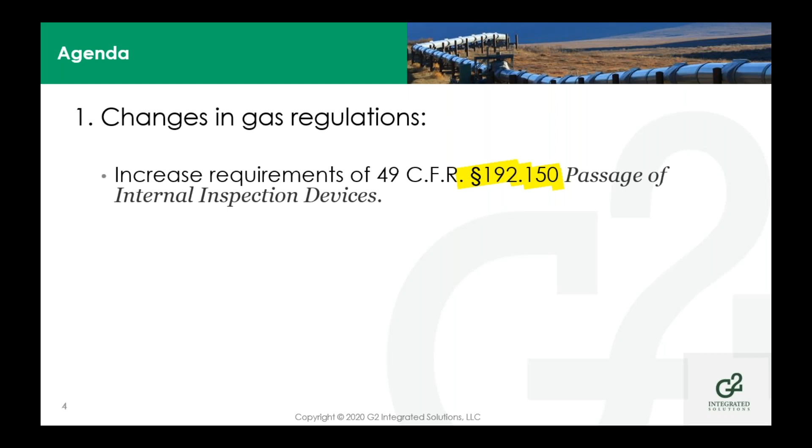Thank you, Marisa. Today we're going to talk about some of the changes in gas pipeline safety regulations. PHMSA will increase the requirements of Section 192.150, passage of internal inspection devices, and will incorporate 3 documents by reference in the new Section 192.493, inline inspection of pipelines. Finally, we'll go over a clear example of a specific implementation for a pipeline operator so that you can see what you need to do to be in compliance.

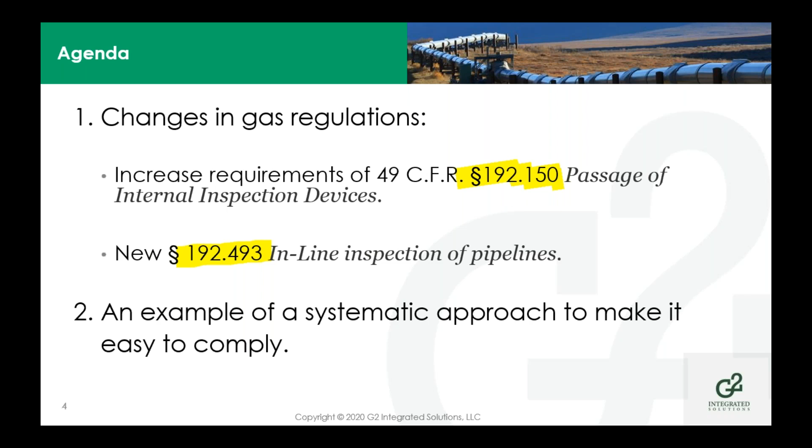So let's get started. But first, let me take you back in time 55 years to the year 1965. It is March 4, 6:03 a.m. A big explosion is about to happen.

Natchitoches, Louisiana, a high-pressure natural gas pipeline manufactured shortly after 1945 exploded, and the flames from the escaping gas were about 400 feet high before workers managed to stop the flow of gas by hand. The explosion created a crater 75 feet long by 30 feet wide. 3 sections of pipe with a total weight of 1,000 pounds were ejected as far as 350 feet away.

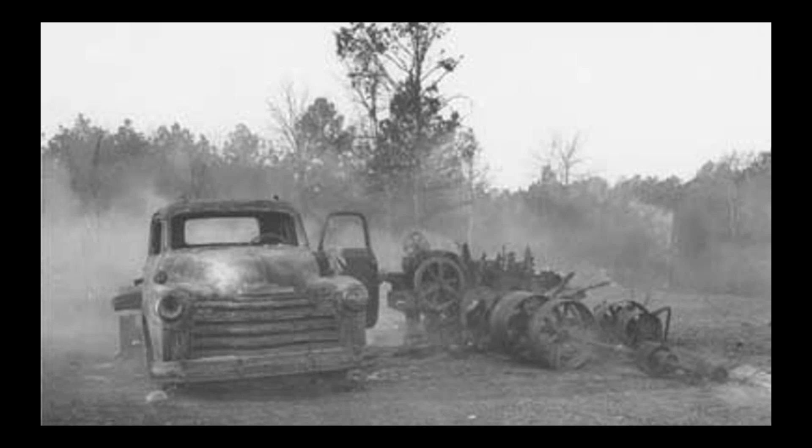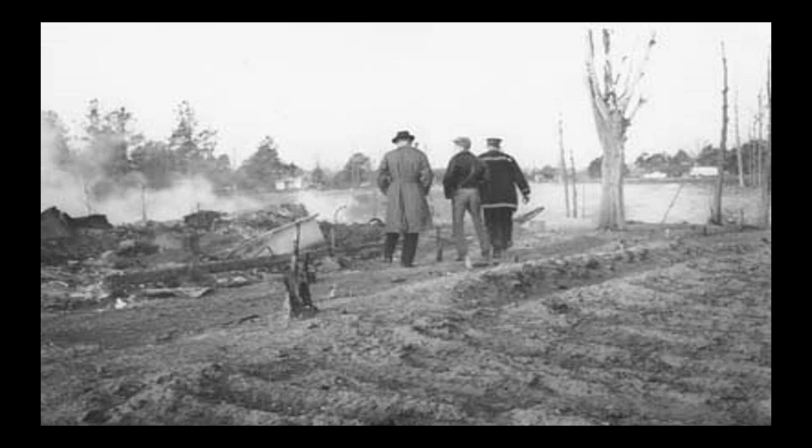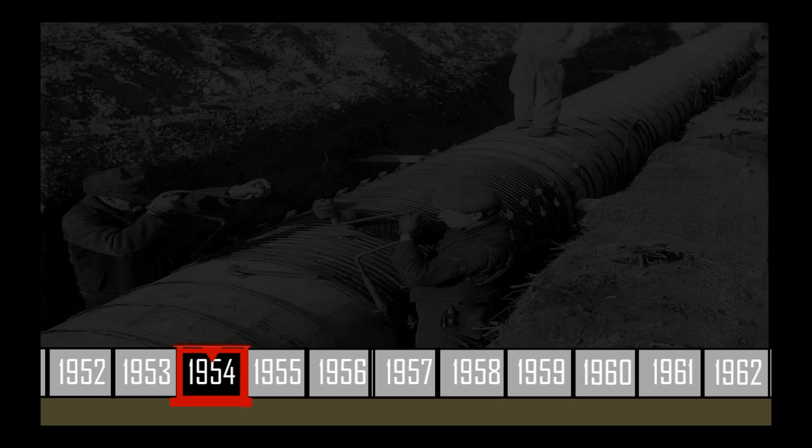There had been other pipeline incidents before, but this explosion focused attention on pipeline safety and led to then-President Lyndon Johnson to call for the formation of a National Pipeline Safety Agency, which eventually would be created 3 years later in 1968. 10 years earlier, the same pipeline had ruptured once about 300 yards away in the spring of 1954.

And this brings us to the moral of the story, best expressed by George Santayana's famous quote: 'Those who fail to learn from history are doomed to repeat it.' But let me take the liberty to change his words: those who fail to learn from pipeline history are doomed to repeat it. Hopefully by the end of this presentation, the words of George Santayana will make more sense.

Pecos River, New Mexico, Saturday, August 19, 2000. A 30-inch diameter natural gas transmission pipeline ruptured and exploded, reaching a temperature of 1200 degrees Fahrenheit. The fireball, 500 feet tall, was visible 20 miles away in Carlsbad, New Mexico.

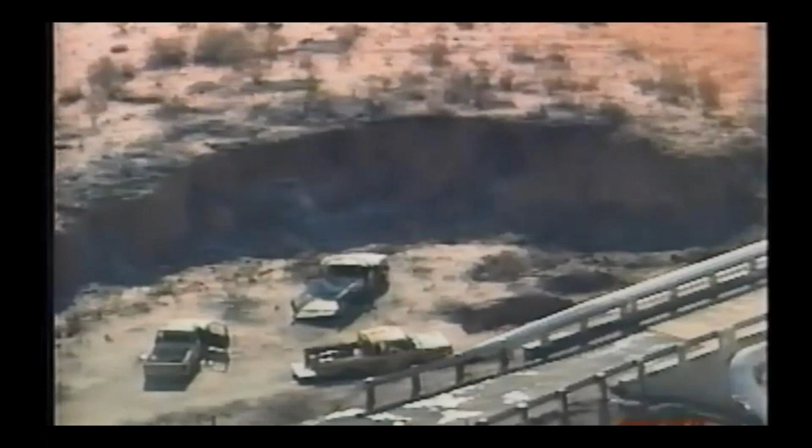Before the firemen could get close, they had to retreat and wait for workers to turn off the flow of gas by hand. A family of 12 was caught in the fireball, 5 of them young children. They were camping beneath this bridge. Only one victim would survive past the first few days.

The force of the explosion created this crater, 113 feet long by 51 feet wide. And the distance between the rupture site and the east bank of the river where the family was camped was almost 700 feet.

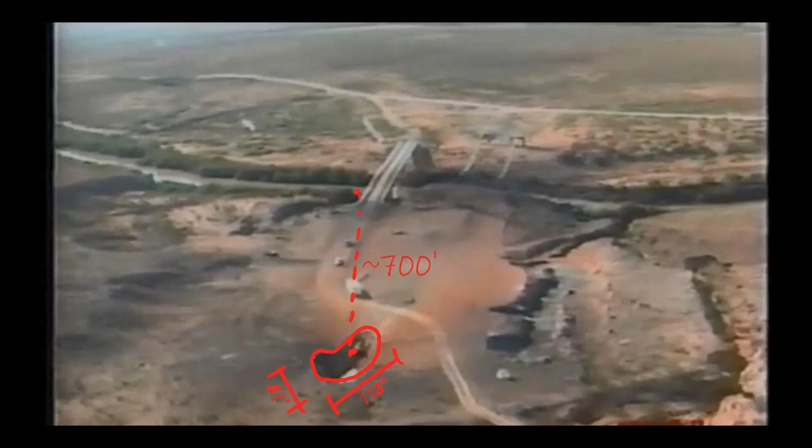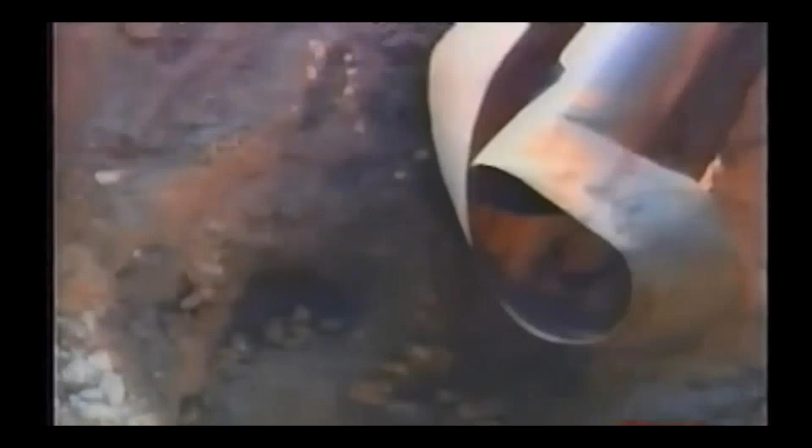A 49-foot section of the pipe was ejected, and part of it was found almost 300 feet away. The pipeline was laid in 1950, and in all that time, it had never been checked on the inside.

Let's fast forward 10 years to 2010. In San Bruno, California, a 30-inch diameter segment of an interstate natural gas transmission pipeline ruptured in a residential area. Approximately 48 million cubic feet of natural gas ignited. It took 95 minutes to stop the flow of gas. That was a very long night.

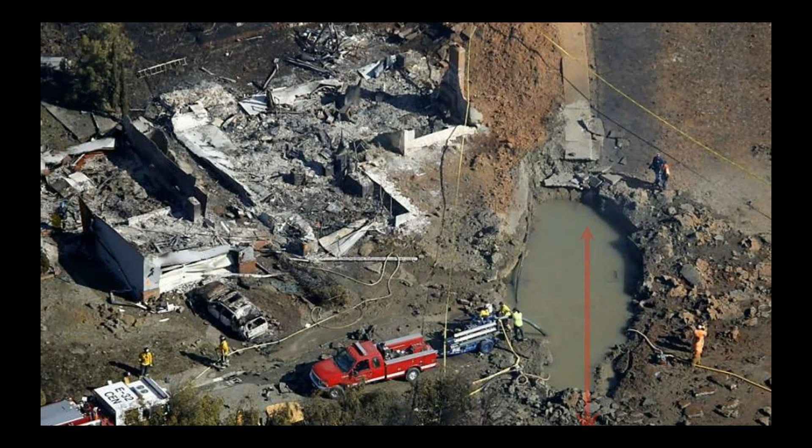This is not a scene taken from a dystopian movie. The flames damaged 70 homes and completely destroyed 38. 8 people were killed, 58 were severely injured. The rupture produced a crater about 72 feet long by 26 feet wide.

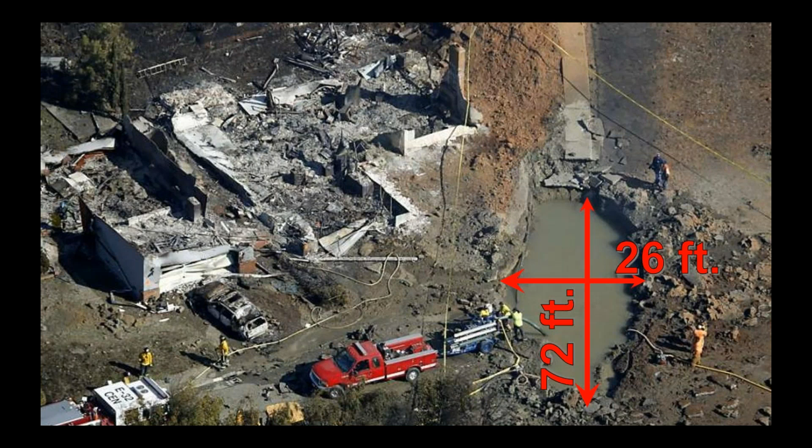A 28-foot-long section of pipe that ruptured, with a total weight of about 3,000 pounds, was found 100 feet south of the crater.

In 1956, the 30-inch diameter pipe, grade X52, with a wall thickness of 375 thousandths of an inch, was installed with a substandard and poorly welded section that was even visible. The flaw, over time, grew to a critical size, causing the pipeline to rupture during a pressure increase.

So our future cannot be more of this. These pipelines have never been inspected, so a good place to start is to look at the recent changes to our current safety regulations.

Our current pipeline safety regulations in Section 150 require that pipelines be designed and constructed to accommodate ILI devices. But up to this point, they were silent on technical standards for implementing requirements to assure they were designed and built for inline inspection assessments. The strengthening of Section 150 by incorporating NACE Standard Practice 0102 will establish consistent standards for the design and construction of piggable pipelines. But it is not enough to internally inspect the pipeline.

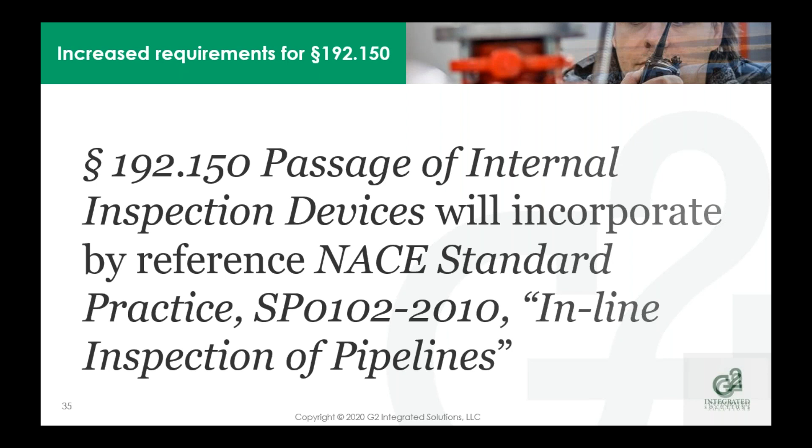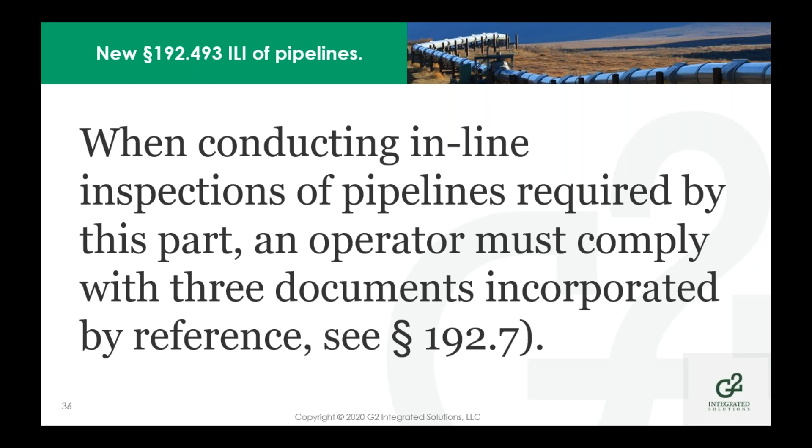You need to do it the right way. For this reason, the gas mega rule also includes this new section 192.493. It means that when conducting inline inspections of gas pipelines, you must comply with the requirements and recommendations of 3 documents. Let's review these documents.

The first one, the NACE Standard Practice 0102, in Section 7, New Construction Planning for Inline Inspection Surveys, will establish technical standards for the design and construction of pipelines to accommodate inline inspection devices. It will also improve inline inspection tool selection.

The second document, the API Standard 1163 Inline Inspection Systems Qualification Standard, is an umbrella document that covers all aspects of inline inspection from the planning to the verification and validation of the inline inspection run.

And finally, the third document, the ANSI ASNT ILI-PQ Inline Inspection Personnel Qualification and Certification, will promote a higher level of safety by establishing consistent standards to qualify the people behind your inline inspection.

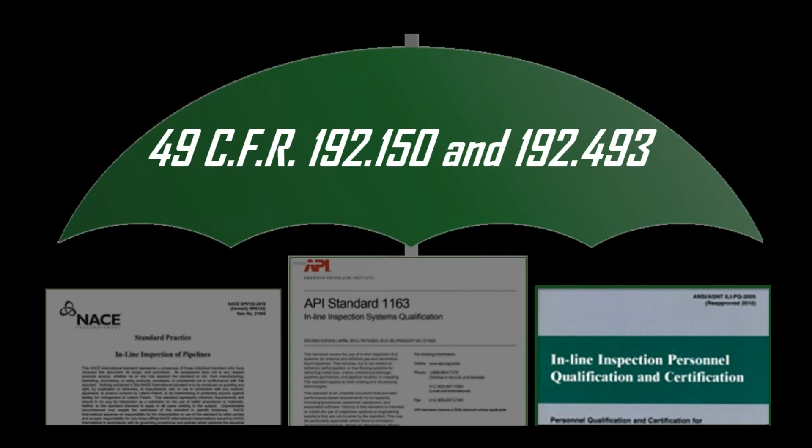Operators need to verify the competence of the inline inspection personnel: their education, their training, their experience, and skills. But it is more than just requesting a piece of paper from the ILI vendor with just a certification. There is much more to audit: written procedures, training programs, examinations, testing of personnel, and performance evaluations.

These new gas requirements will be effective on July 1st, 2020, in just a couple of weeks. So what is the problem?

Previously, the acceptance of an inline inspection run had been based primarily on a validation process where the results of the inspection were compared to the results of field measurements. At best, the comparison can only show that the inline inspection run is consistent or inconsistent with results collected in the field. The procedure does not prove that the inline inspection meets its performance specification.

The inline inspection run is accepted unless evidence to the contrary is found once the verification program has been finished, sometimes many months after the launching of the inline inspection tool, when it may be too late.

So the solution: we need a systematic approach to clearly evaluate the quality at each step of the inline inspection run, not just at the field verification process, and decide based on that systematic approach whether the run should be accepted or rejected at any stage of the process.

The new process is this 11-step process, and is divided to ensure that the procedures are followed during all the way of the inline inspection: prior to the run, during the run, and after the inspection.

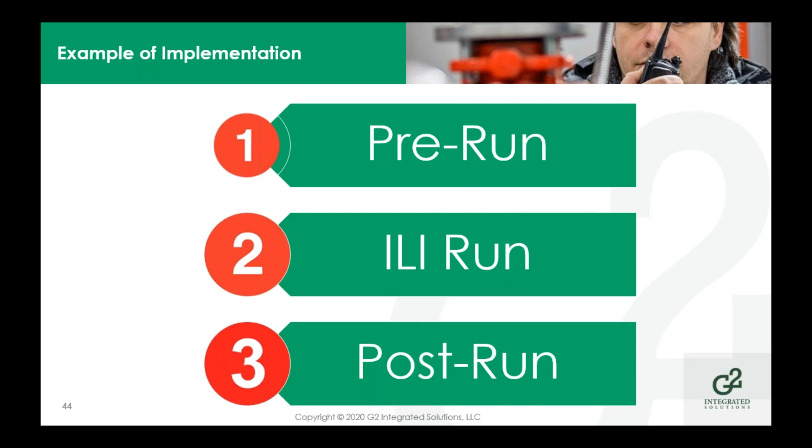The fundamental premise of the methodology is that high-quality inline inspection data is a consequence of technology, planning, and execution. Let's review the first step, the pre-run stage, and then with the first checkpoint, the tool selection.

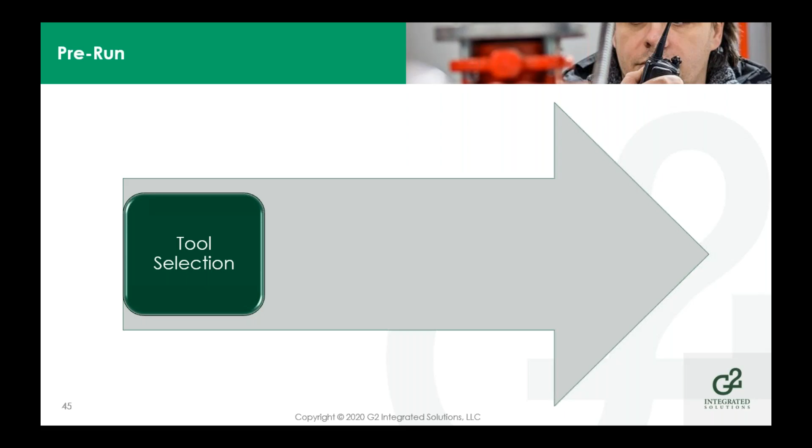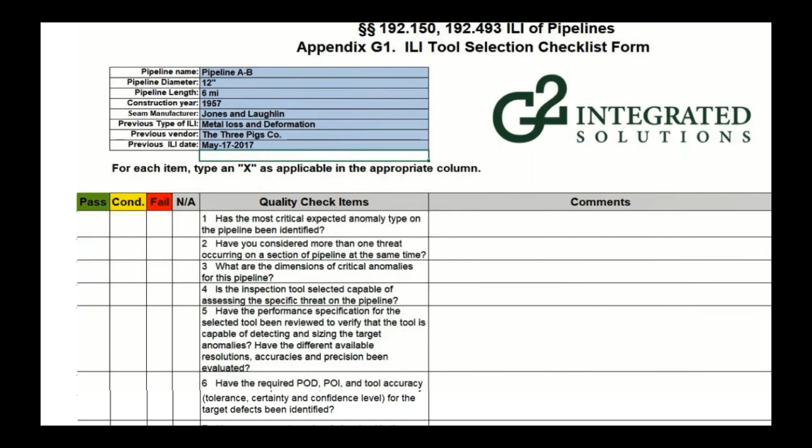After the basic information has been input, the operator needs to assign a score to each item to make sure that the particular procedure is followed. For example, you need to make sure that during the selection process, the main threat and possible combination of threats have been identified.

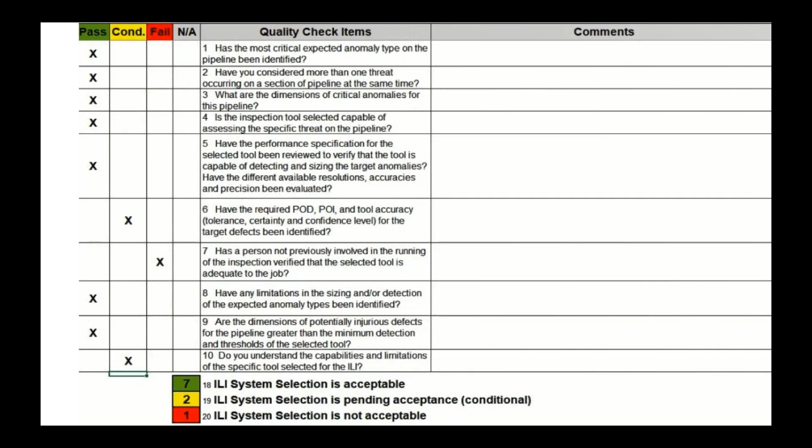Then the target anomalies must be reviewed, and so on. All checks must have a pass or a conditional pass for the run to be accepted. A score pass indicates that the proper procedure was followed. A conditional pass indicates that some irregularities were found in the procedure, but that the effect on the data is not significant, or that additional actions may be required to ensure that the conditional pass is resolved. Finally, a fail will show that you cannot continue unless you are going to accept a compromise in the data.

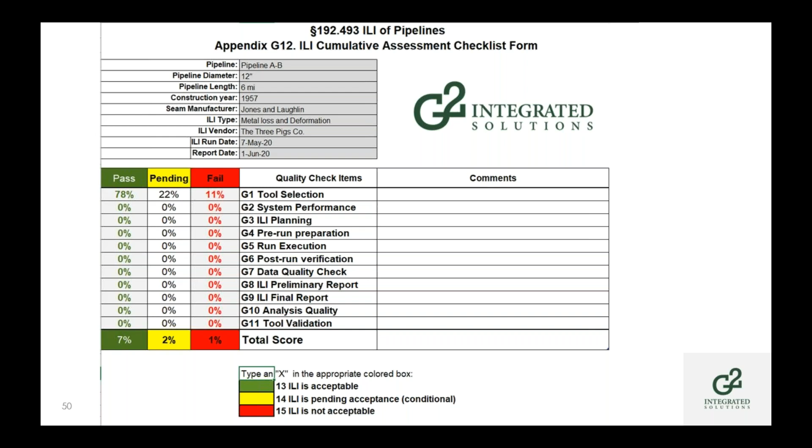The final cumulative check is a review of all the conditional passes to ensure that the overall effect on the data is acceptable. Fail in this case indicates that the data will be compromised in some way and that the run cannot be accepted. So let's complete the procedure to eliminate the fail score so that we can proceed.

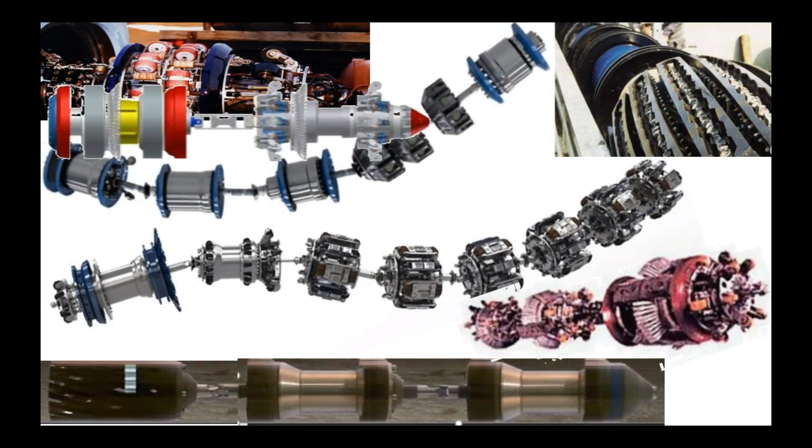There is a lot of inline inspection tools available, but which tool gives you the biggest bang for the buck? The NACE standard Practice 0102 provides this table with anomaly types and available tool categories, indicating their fit for the objective of the inspection.

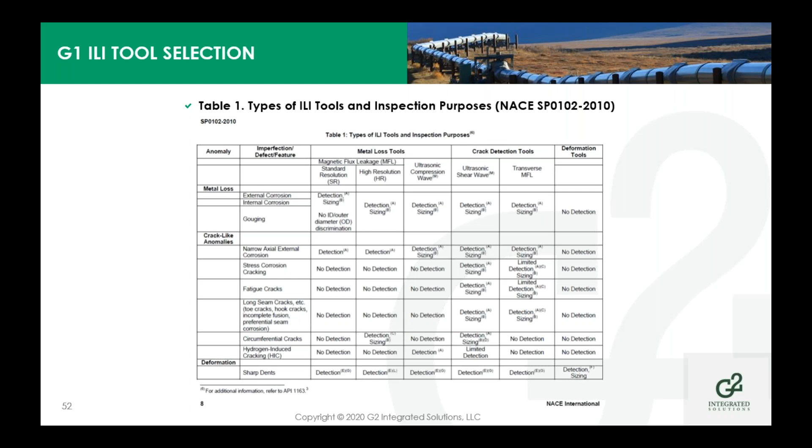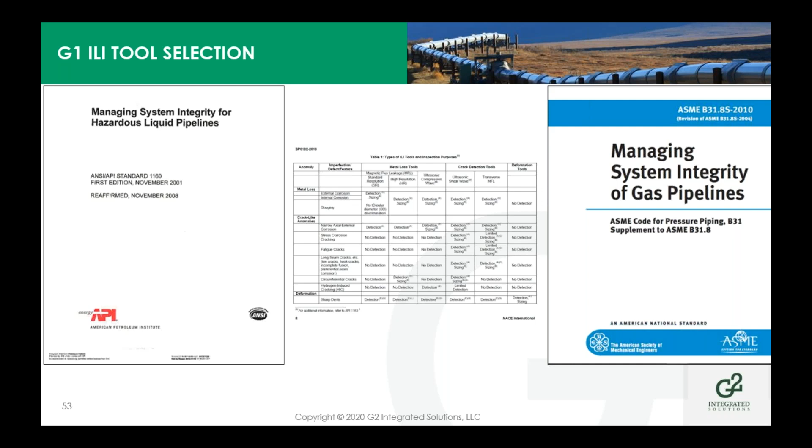However, the selection of the inline inspection tool must be completed with documentations like the API Standard 1160, Managing System Integrity for Hazardous Liquid Pipelines, which provides a process for assessment of potential risks, and the ASME B31.8S, Managing System Integrity for Gas Pipelines, which provides information necessary to develop and implement an effective integrity management program. An electronic version of the table is included in the checklist.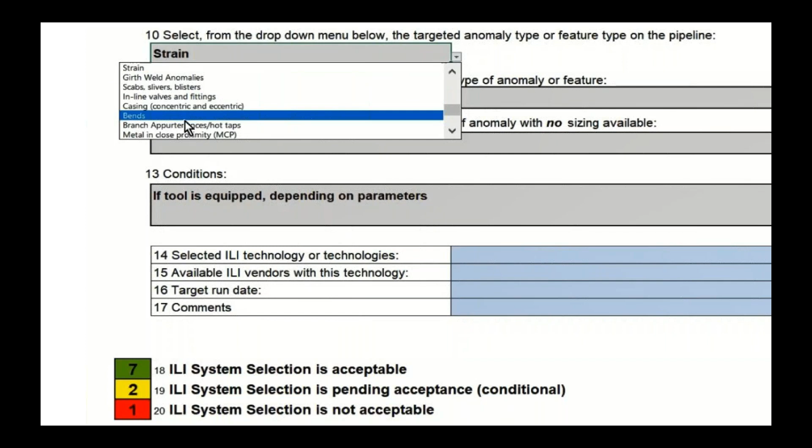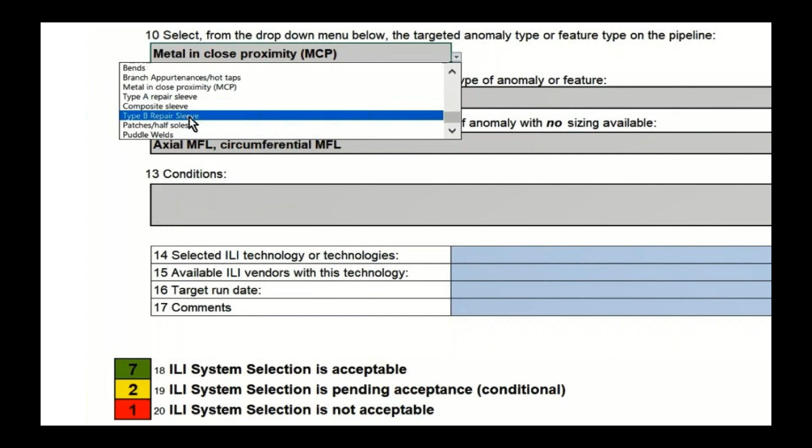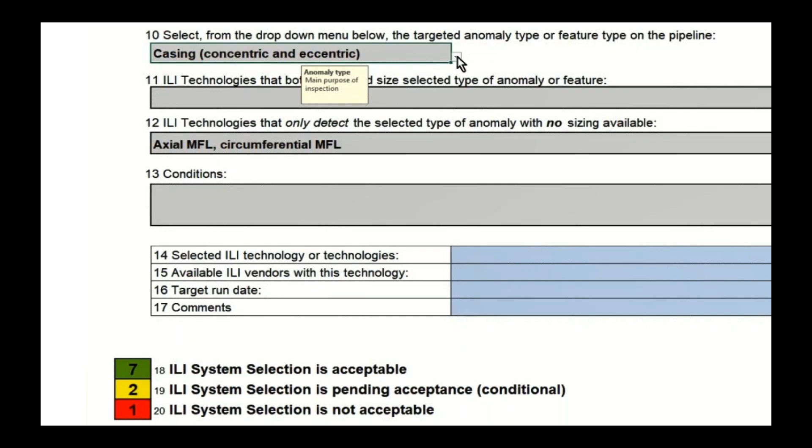There is no best tool, no silver bullet. There is, however, a best tool for specific inspection requirements, but you need to have a clear understanding of limitations and advantages of each inline inspection technology. To understand, you need to understand the type of anomalies that you are looking for, as well as the pipeline operating parameters. To select the best tool for the job is not an easy task, as you can imagine, and must be done carefully.

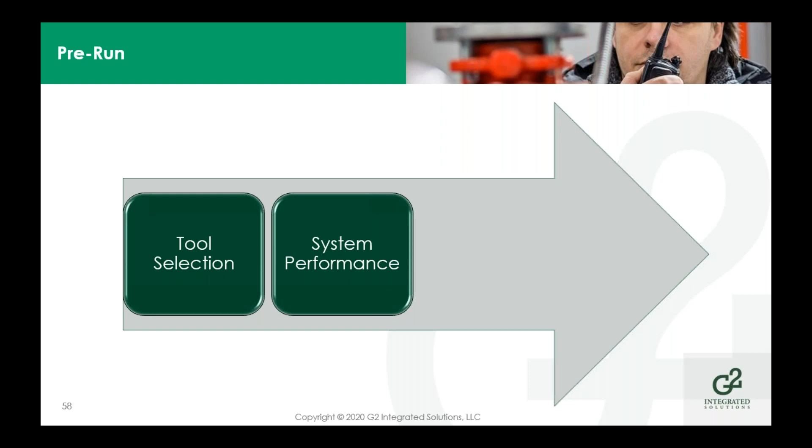The second step is the system performance, and this will assess the performance of the selected inline inspection tool to ensure not only that the technology can detect and size the anomalies, but also that the inspection system is able to deliver quality data, as demonstrated by its history of successful runs.

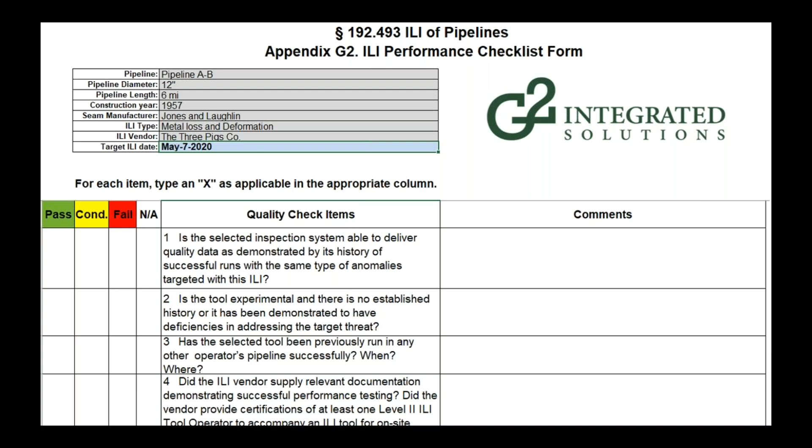In some cases, you may decide to run an untested technology, but this will require an ample and extensive validation before using the run results to assess the threats of your system. In a similar manner, if you have not previously used a particular tool, you will need to request an inline inspection vendor with relevant documentation demonstrating the successful performance of that particular inline inspection tool or technology that you want to use.

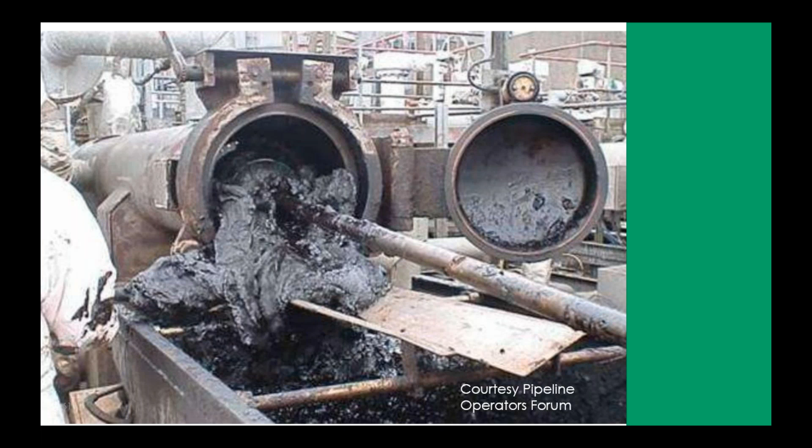The third one is the planning. Now that you have verified the historical system performance of the tool, it is time for the planning. And one of the most important steps during planning is the cleaning activities. Cleaning targets must be met prior to the inspection to avoid degradation of the data quality or even complete loss of data. Some technologies are more susceptible to debris, wax, and dirt than others. But in general, you want to clean for inspection.

Adequate planning and preparation makes a difference between a successful run and a failed run. Any short radius bends should be addressed on a case-by-case basis. Bends installed in a back-to-back configuration, that is without a section of straight pipe between the bends, can present a sticking hazard for inline inspection tools. Field bends and river crossings must be reviewed throughout the survey because they become a hazard also, especially in older construction. They may contain tight radius bends, even miter bends, barred and back-to-back tees, branch connections.

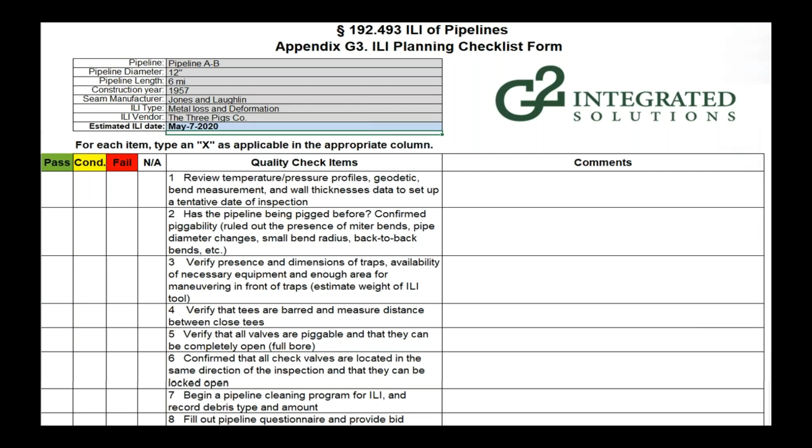30% of the pipe diameter or greater should have scraper bars. Valves - reduced bore valves can result in tool damage, and the list goes on and on. A complete pipeline questionnaire is part of the inline inspection planning. So it is important to provide as much information as possible to the vendor to avoid unforeseen problems and delays. Here is where the questionnaire comes handy.

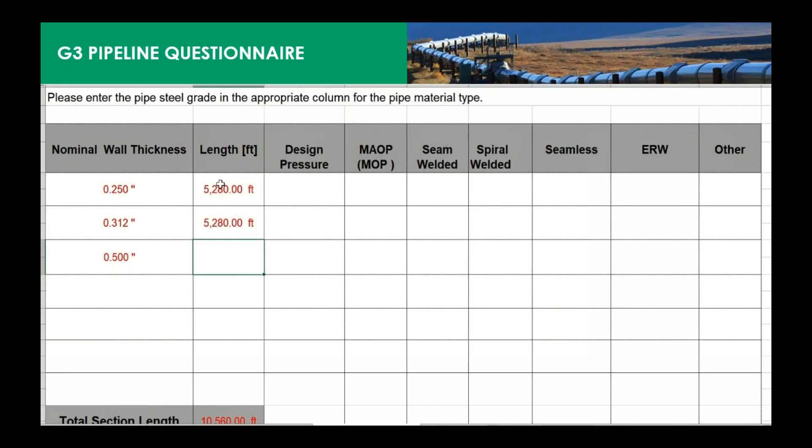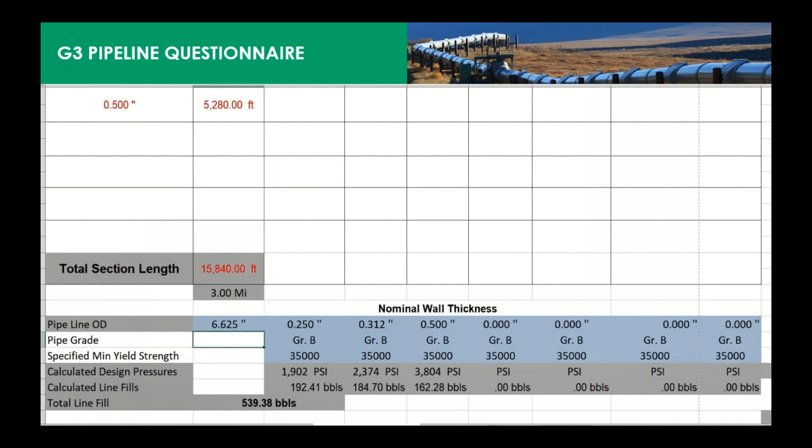For example, wall thickness is an important parameter for which some tools need to be calibrated, and therefore must be considered. In addition, the ILI vendor needs to consider changes in wall thickness that are less than a quarter of an inch or greater than half an inch. For a smaller diameter, line with heavy wall pipe may severely limit the types of tools that can be successfully used.

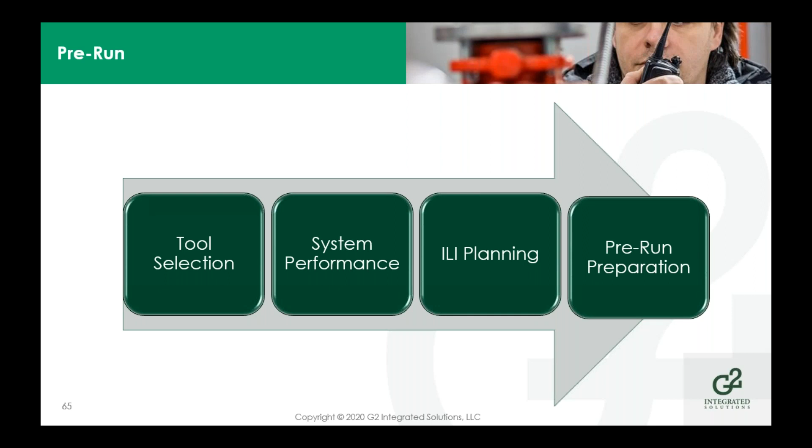The next step is the pre-run preparation. These checks are used to ensure that the inline inspection tool is in good working condition, that the mechanical and electronic components of the tool perform as designed. There are two types of checks to resolve this question: mechanical checks and function checks.

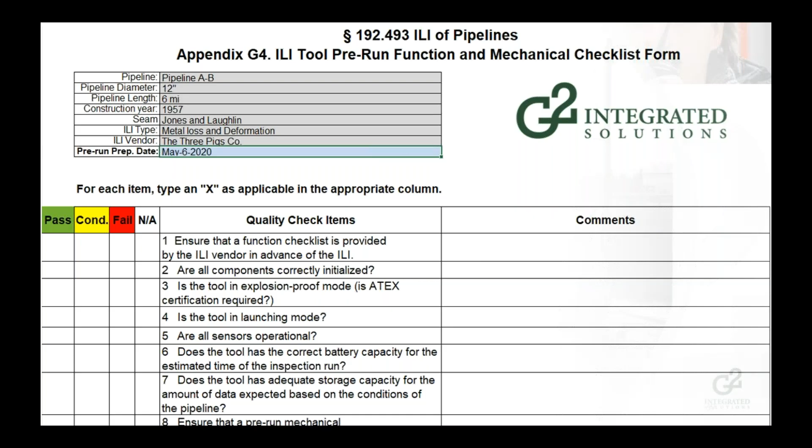The other type of checks are the function checks. They confirm the functional integrity of the tool prior to loading the inline inspection tool into the launcher. In general, these checks are somewhat specific to each technology and vendor. For this reason, the function checklist must be provided by your ILI vendor well in advance of the inspection to complement your pre-checklist. Some examples of pre-run function checks are: all components of the inspection tool must be properly initialized, confirm the availability of power supply, confirmation that all sensors are operational, confirm availability of data storage, etc.

Mechanical checks in the field are mostly visual and specific to each technology too. In the same manner as the functional checklist, the pre-run mechanical checklist must be provided by the ILI vendor to complement this checklist. Some examples of mechanical checks are: a general visual inspection of the tool, confirming that the pressure seals around electronic components are adequate, verify the integrity of cups, make sure that all wheels are intact and moving correctly. Usually photographs will be attached to the checklist to verify the actual conditions of the tool before putting it in the launcher.

Run execution. Here is where the fun part begins, but it's no time to take a break and wait. There are a lot of things to do. Is the actual inspection being conducted in a way that ensures high quality data? Is it following established standards? A job-specific plan that includes technical requirements, responsibility, emergency contacts, procedures, work site preparations, and mobilization is important. Here also are some of the activities that need to be performed during the run execution phase.

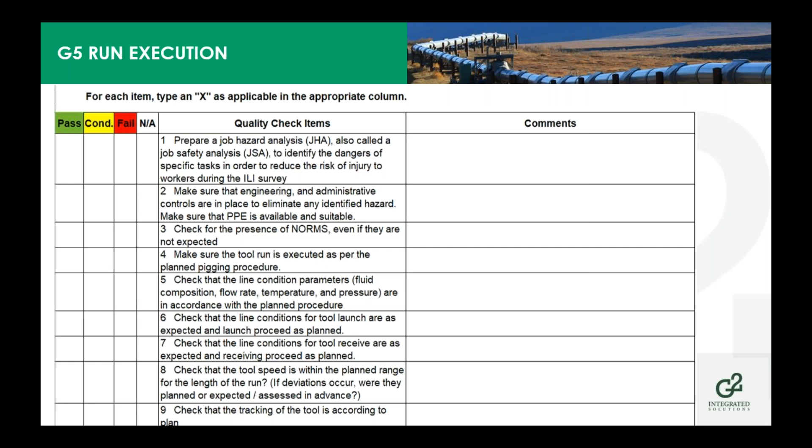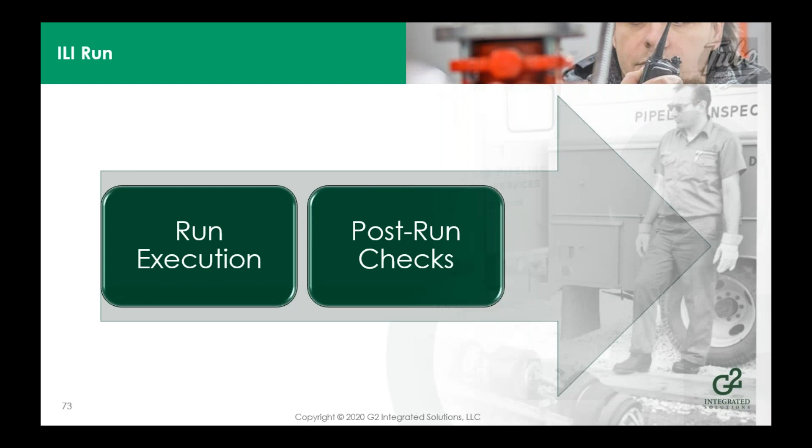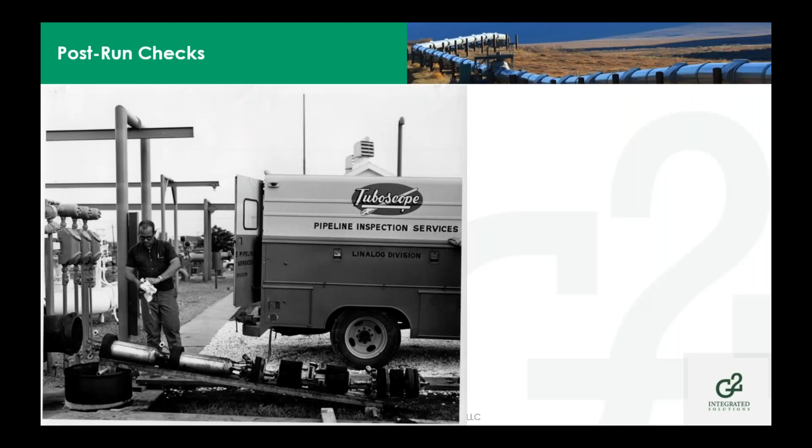After the run execution, the post-run checks come again. You trap the tool in one piece, but now there is no time to celebrate like Bob here. You cannot celebrate your small win, not yet. It is time for more functional and mechanical checks. So it's time to get your hands dirty. It's time to make mechanical checks.

So in the same way as with the pre-run checks, you have to perform a set of mechanical and functional checks. Examples of them are: general visual inspection, but now you have to look for damage that may occur during the run. You have to look for the cleanliness and location of debris, where the debris accumulated during the run, and take note of that. Check for the wear and tear of the tool, ensuring that all parts are still intact and moving appropriately.

Photographs are very important in this stage to document the tool at the receiver trap. Some examples of post-run function checks are appropriate operations of all components, the acceptability and availability of power supply in the tool. You have to confirm that all sensors are operational, confirm acceptability and availability of data storage, and confirm that all components in the inspection tool, that the tool is in recording mode.

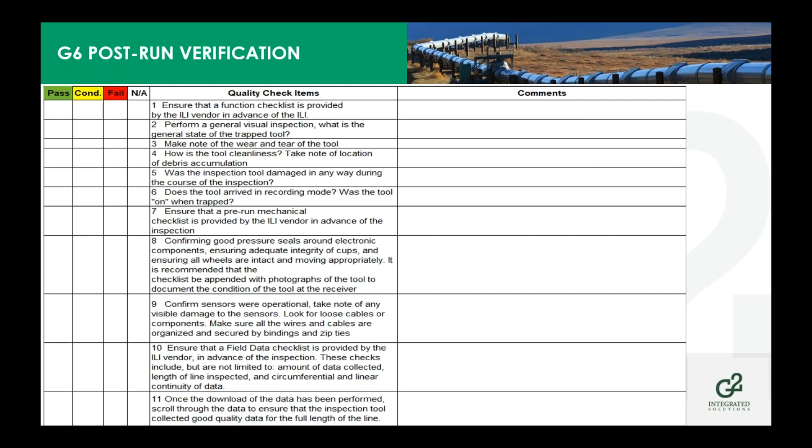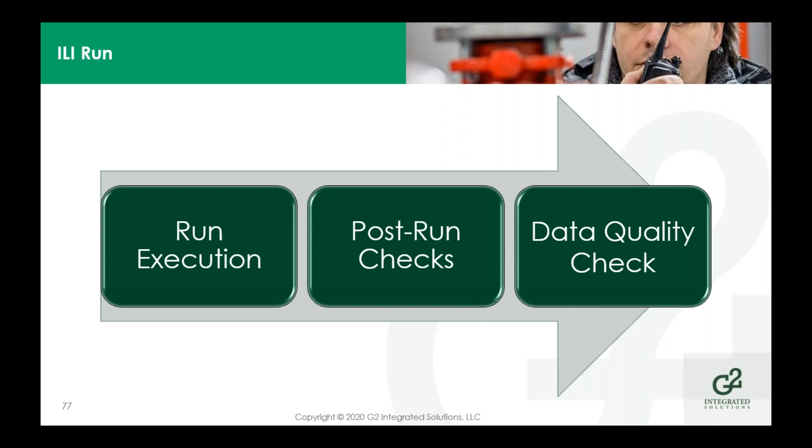This is key. After the post-run checks comes the good stage, the data quality check, because after all, that's the reason you are in all this trouble. So check for the quality of the data.

A field or initial data quality check must be a comprehensive data quality assessment with a rapid scrolling through the data using the vendor's visualization software to detect any possible areas with missing data or with striking signals, to confirm that the data meet basic quality requirements.

A report with a series of specialized checks to ensure that the data has quality and integrity must contain, as a minimum, three things. First, the data needs to be complete.

The amount of collected data must be checked after the initial processing and compared with the actual length of the inspected pipeline. In general, an inline inspection survey must not have data loss in more than 3% of the total coverage area. If the data show two or more consecutive failed sensors along the line, it must be evaluated with caution on a case-by-case basis, depending on the tool technology and target anomalies for inspection.

The second thing you need to look for is data plausibility. Plausibility measures how reasonable the data appears to be and the likelihood that the data corresponds to the actual conditions of the pipe. Scrolling through the data to identify the presence of known pipeline features, such as girth welds, wall thickness changes, fittings, valves, tees, etc., will help you assess the validity of the data.

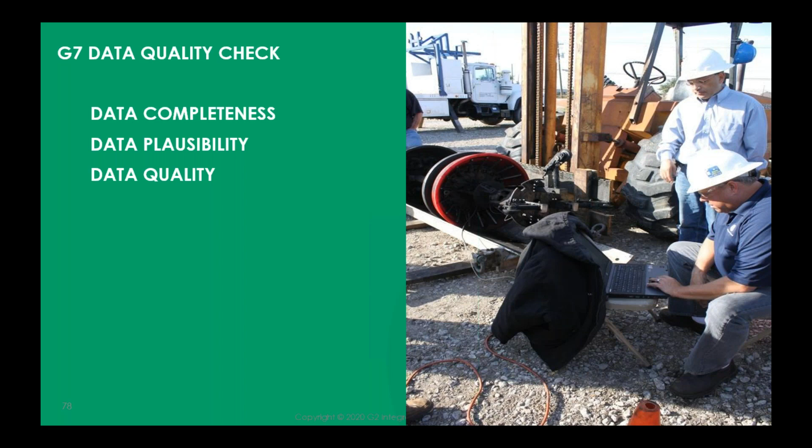Within 5 days of the run, the inline inspection vendor must provide a detailed report with the results of the evaluation. You shouldn't have to wait more than 5 days to get a report that says you have a failed run. That shouldn't happen. You need to identify any data shortfalls and issues with the data that will prevent the vendor from meeting the performance specifications.

In general, the data quality checks are composed of two basic elements: the auxiliary data, and the technology-specific data. The auxiliary data may include information regarding tool speed, product or inspection medium, temperature, operating pressure, odometer counts. And technology-specific data include, for instance, magnetization levels for magnetic flux leakage tools, and coupling loss or echo loss for ultrasonic tools.

The auxiliary data helps you determine if the tool operated within the tool specifications for speed, temperature, pressure, and if odometer counts progress at predictable intervals. This information is used in context to make general judgments about the basic operation of the ILI tool.

For instance, an MFL tool that ran above the maximum speed will not only produce data with a lower axial resolution, but the accuracy of each individual reading will be totally affected by this. So you may consider it a failed run for the purpose of detecting the target anomalies.

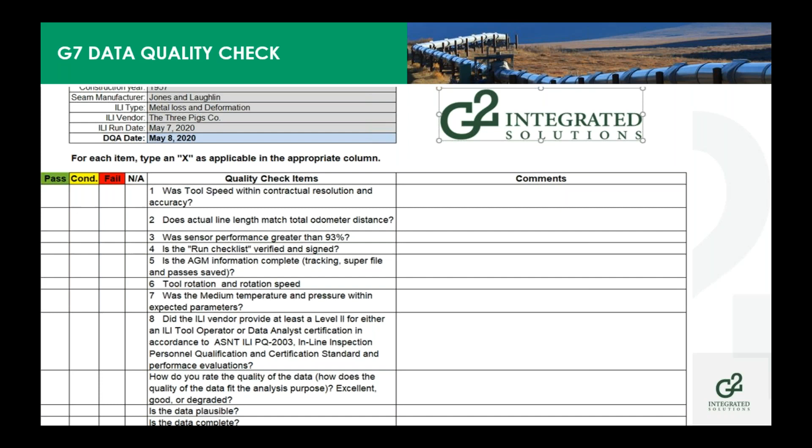Now, the preliminary report usually takes about 15 to 30 days after the tool comes out of the line. At this stage, you need a checklist based on proper input parameters, such as whether the pipeline diameter is correct.

Is the pipeline diameter in the report correct? Is the wall thickness correct? Is the predominant wall thickness correct? The grade, the full length of the line — this is really critical. The length of the actual pipeline must correspond to the length of the inspection.

For gas pipelines, at least the vendor needs to report dents, wrinkles, buckles, and ripples with metal loss regardless of orientation. If no anomalies met the preliminary report criteria, a preliminary report is still required, stating that no anomalies met these conditions. But as a minimum, a list of detected girth welds — known as pipe book or pipe tally — with AGM location must be provided.

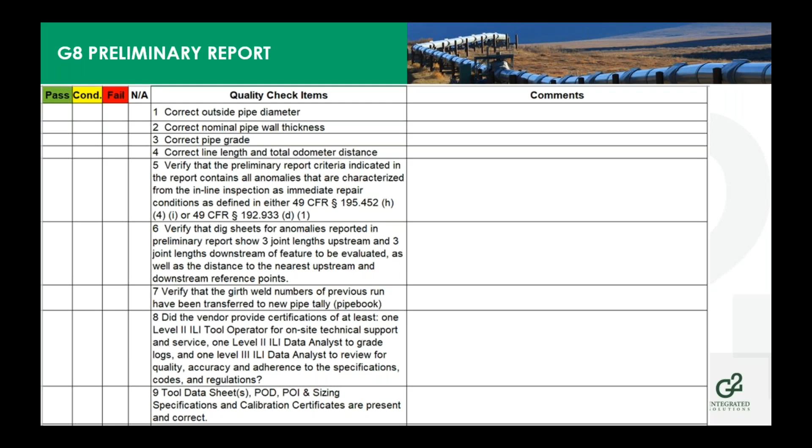After the preliminary report comes the final report. It usually takes between 1 and 3 months, and shouldn't take more than 3 months for any technology.

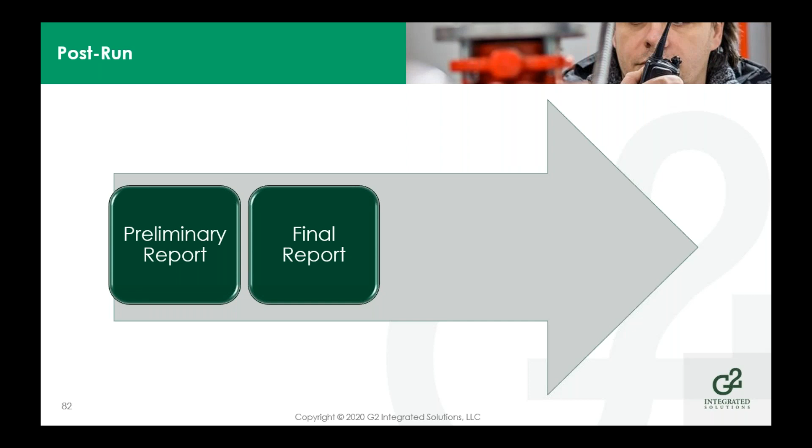After the tool comes out of the line, it's time to check again some basic information, like pipe diameter, nominal wall thickness, pipe grade, length, total odometer counts, and the AGM list, etc.

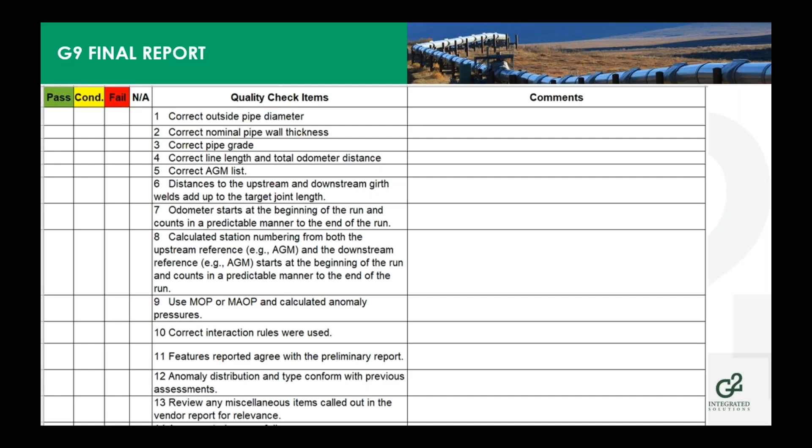Finally, before completing the final report, you need to make sure the data analysis has quality in its process. Some examples of checks are to go through the data and check for extremely short, extremely long, or unusual joint lengths, and verify in the data that the length of these joints is what you expect to have in your pipeline.

If the tool identifies longitudinal seam orientations, you have to check the pipe joints with no long seam orientation or with long seams that are unusual for your conditions. Verify in the data the actual wall thickness measured by the inline inspection tool, and make sure it corresponds to your predominant wall thickness. Verify that the girth weld ID numbers were transferred from any previous surveys so that you can continue with the same ID numbers.

Some data analysis issues may affect only specific locations, but in many cases, reanalysis of the data or an independent revision of the analysis may be needed to address concerns that may not just be located in one area, but are probably common through the whole pipeline length.

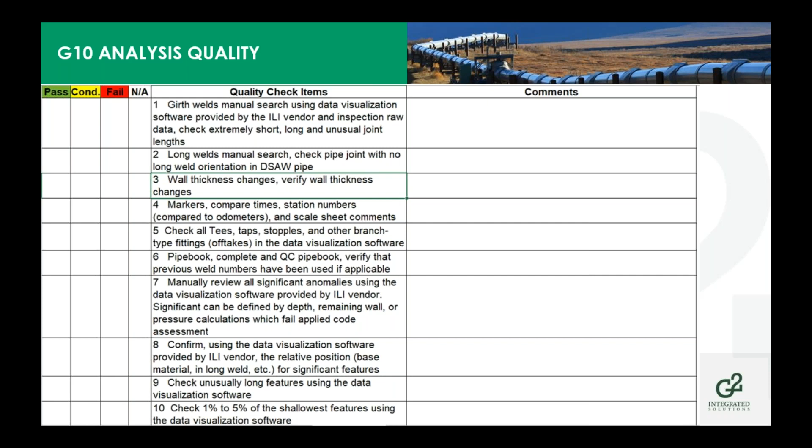After making sure that you have an analysis of quality, you have to go to the data validation. Validation is the assurance that a service meets your needs. Up to this point, we have done verification to make sure that they correspond to the procedure. But now, let's see if the results meet your needs. Are the inline inspection system results consistent with the performance specification?

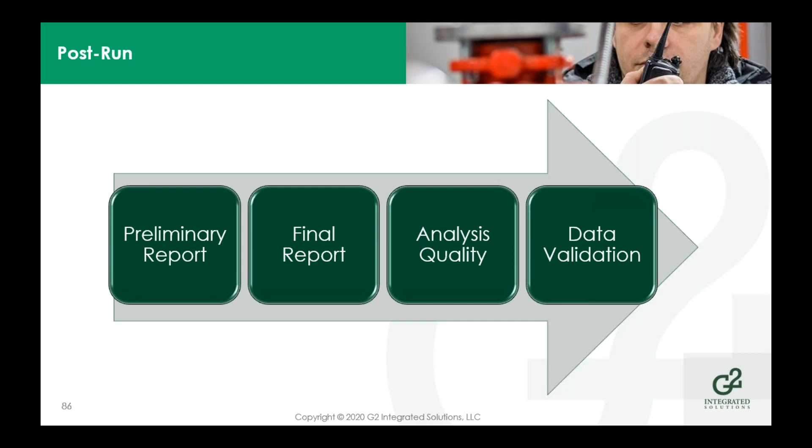An important part of closing the loop is the feedback from the field to the ILI provider, and to explain inconsistencies in the analysis or inconsistencies in the results.

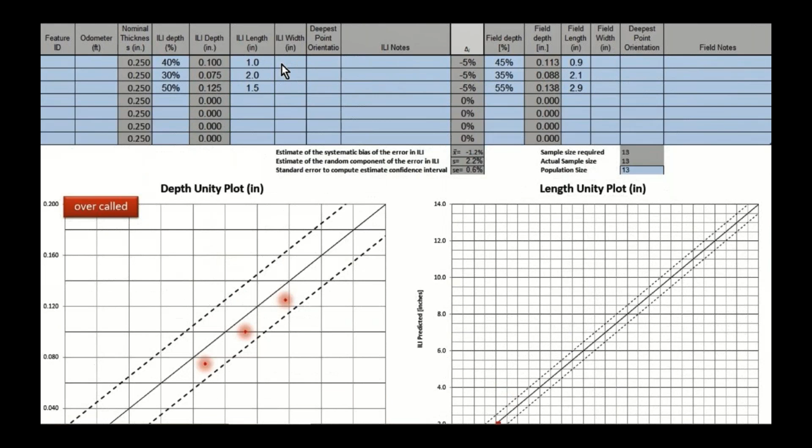Inline inspection accuracy is typically given in terms of tolerance and confidence level, also called certainty by ILI vendors. So a simple method will be to calculate the standard deviation for this particular set of data and compare it with the standard deviation corresponding to the ILI performance specification, which in this case, due to the confidence level and the tolerance of the tool, plus or minus 10%, and the confidence of 80%, is 7.8%. So you will calculate the standard deviation for your sample.

Operators sometimes incorrectly consider the overcall anomalies to be within the reported accuracy. All these anomalies that are overcall for depth need to be considered for the calculations of the accuracy of the tool.

Adding the overcall anomalies outside of the tool accuracy will skew the data. It is also important to remember that even overcall anomalies in one category, such as depth, like this feature here, will correspond to an anomaly that was undercall for another category. Like in this case, it was really undercall, about 1.4 inches in length. So it is important to look at all the data in context.

This will have terrible consequences for the pressure-based assessment. As our nation's pipeline infrastructure gets older, the need for more inline inspection tools and analysis continues to rise. ILI vendors, in an effort to meet the rising needs, continue their drive for greater productivity and faster cycle times. But as often happens in rapid industrial progress, a big advance in one direction sometimes results in a bigger setback in another.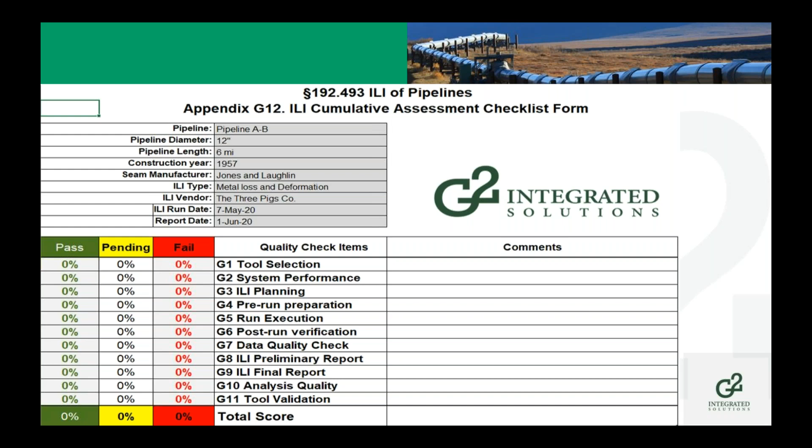This systematic approach provides the big picture of the inline inspection run. This is a means of assessing all the parameters taken as a whole to determine if the tool performance was acceptable. This parameter is a mechanism to ensure that pending or conditional items do not result in an acceptable run.

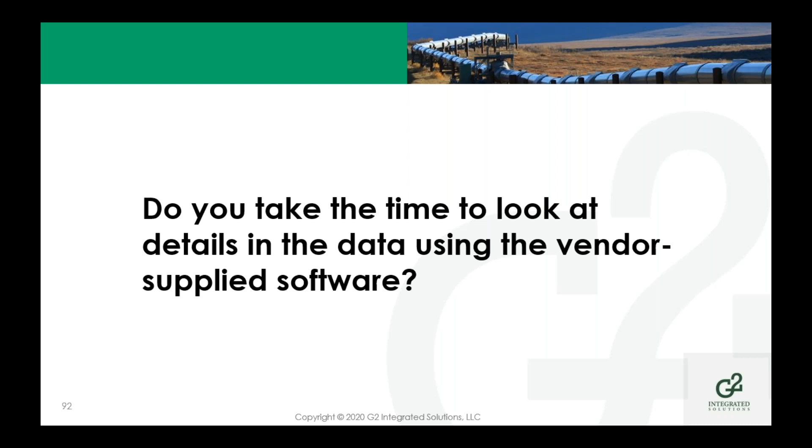Do you take the time to look for inconsistencies in the report, in the ILI data that you receive? Do you take the time to look at the inline inspection data? The time invested in reviewing the inline inspection data in context, and doing this checklist, will bring you many benefits.

After all, your top priority must be a safe pipeline operation, and this in turn will minimize costs and maximize your productivity. Because after all, managing the integrity of a pipe is not really about what you found and responded to using the inline inspection results. At the end of the day, the true integrity of the pipe is based on how confident you are about the features that remain in the pipe that you have decided not to respond to.

Doing all of this will not guarantee that you will discover and avoid all possible preventable surprises. But not doing this correctly will increase your chances of getting in trouble, of being out of compliance. Remember, your ILI data might be trying to tell you something, but only if you take the time to look.

Each pipeline system is unique and may contain a variety of threats related to operating conditions, pipeline vintage, and environment.

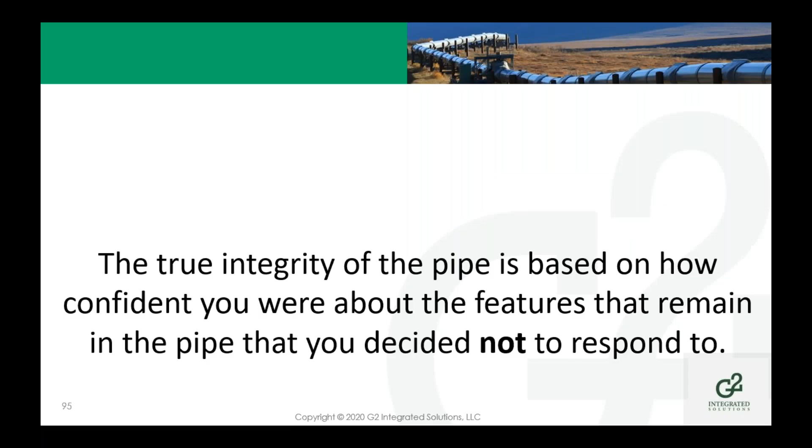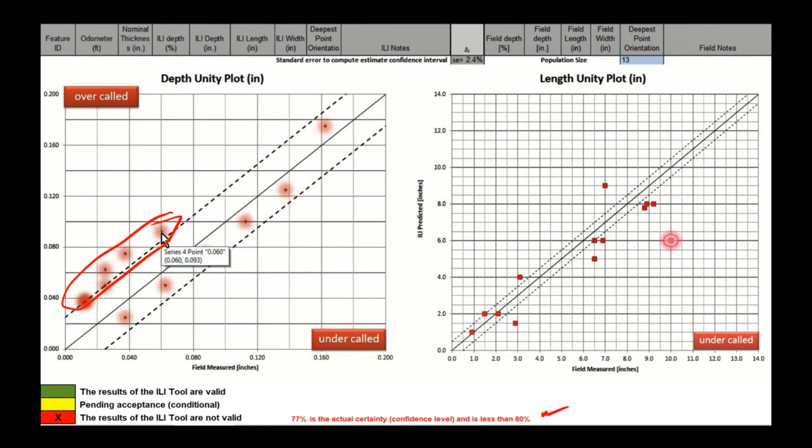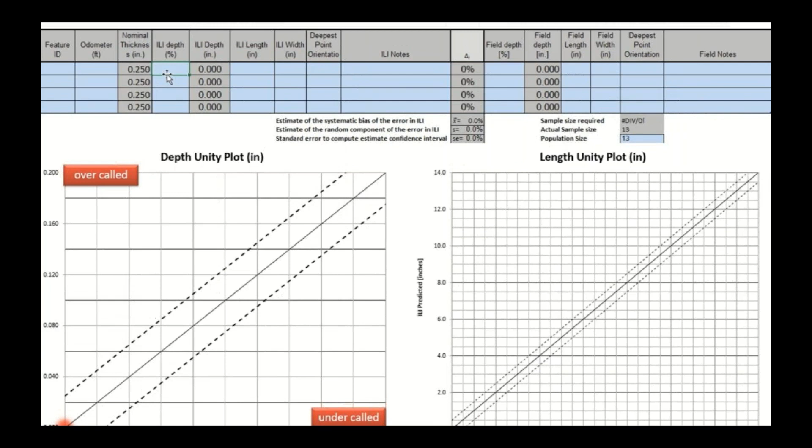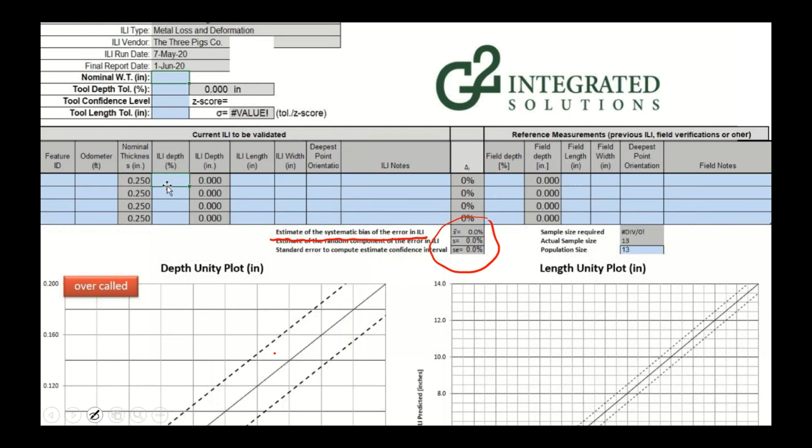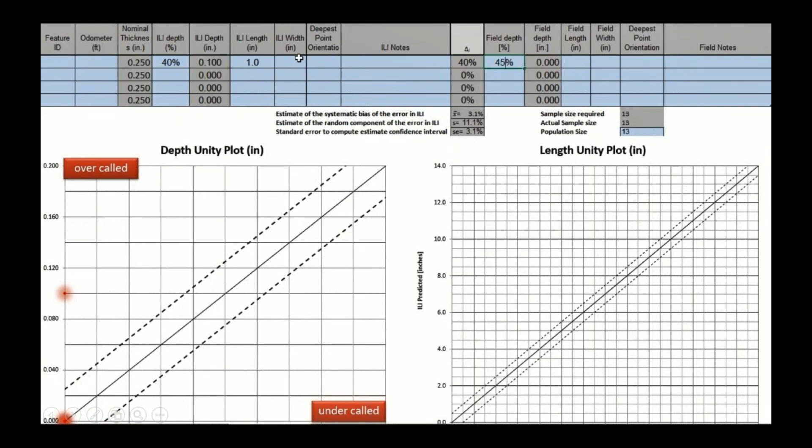You will calculate also, let me go here. You will have to look at the results that you have received, that you have calculated. You have to calculate the systematic bias error, so how the data is skewed, like in this case, is skewed on this side, and you will find the estimated random component that is the standard deviation.

So those are the things that you will need to look at, but you will calculate, and in this case, it's 77, less than 80%. You will have the option to accept the data if you have probably ways to get more field verifications. But to this point, you know for sure that the tool is not within the tolerance and within the confidence level stated in the performance evaluation.

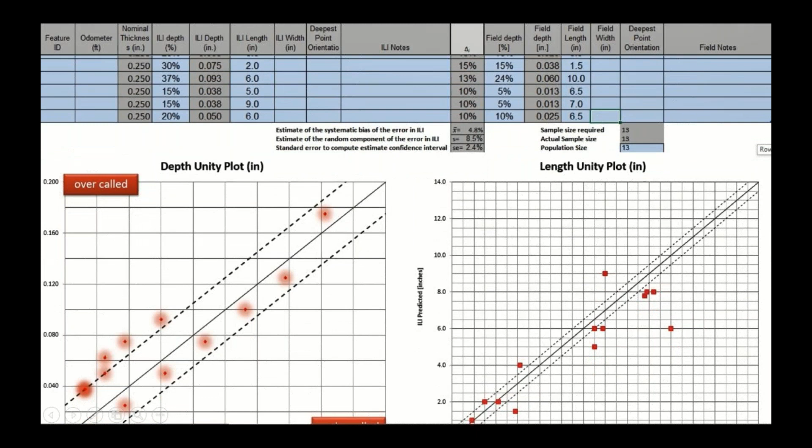So it's up to you to receive the data, to accept the data. But in any case, you must contact the vendor and request an explanation for the lack of consistency or the lack of accuracy in the data. And unfortunately, this is the part where we fail to get good answers and good explanations for these reductions in the specs. You buy something and you are not receiving what you bought.

Well, this is the problem when we rely only on one inline inspection, and usually these errors are in the worst place, the more difficult place to verify, or are in the most terrible place if you have a leak. So the idea is that in general you shouldn't rely on only one inline inspection, but probably this is not the case, and you need to evaluate the quality of the data to make sure that what was called in this river crossing is an actual, valid indication, and that can only be resolved by looking at the data in context, looking at all the inline inspection, not only the river, but the whole inline inspection.